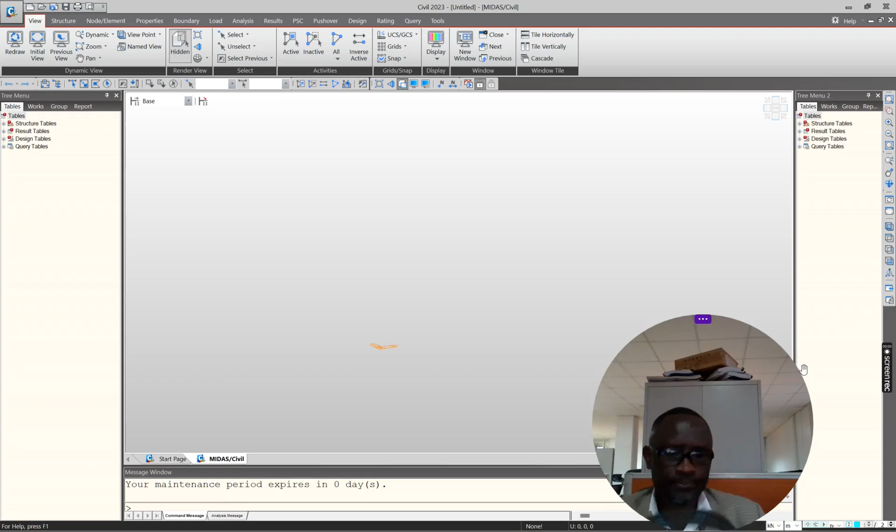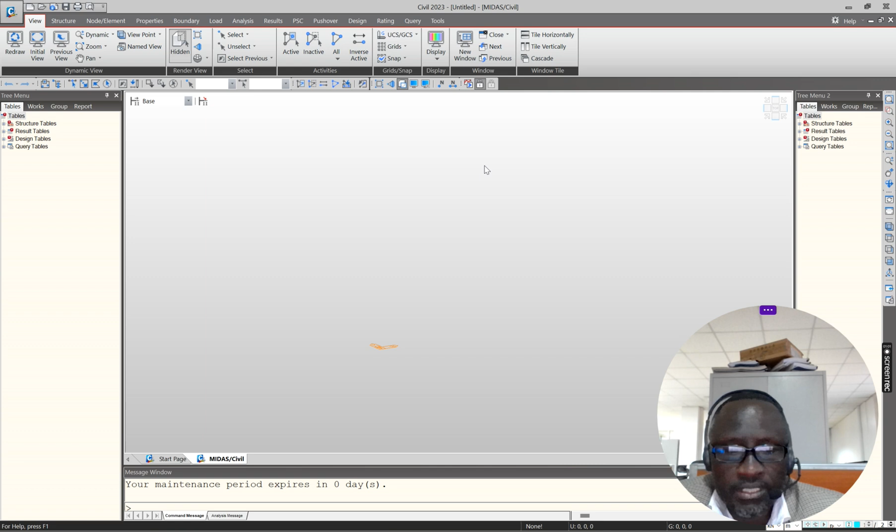So after opening my new model here, the first thing I need to do is, once I understand that the frame has a column of 250 by 250 and a beam of 300 by 250. The longer span has 5 meter spacings and then 9 meter. Some areas have a block infill, so I just want to quickly run a quick model and check the column

reinforcement and beam. So I go to my property materials, I come to add material, I go to steel, concrete, so concrete. When I come down, I think first try a compressive strength of 25. If the model does the design, that would be good. If not, I come to 37, because this model might need a design compressive strength of 37 to give you reinforcement checks. But let me also try that.

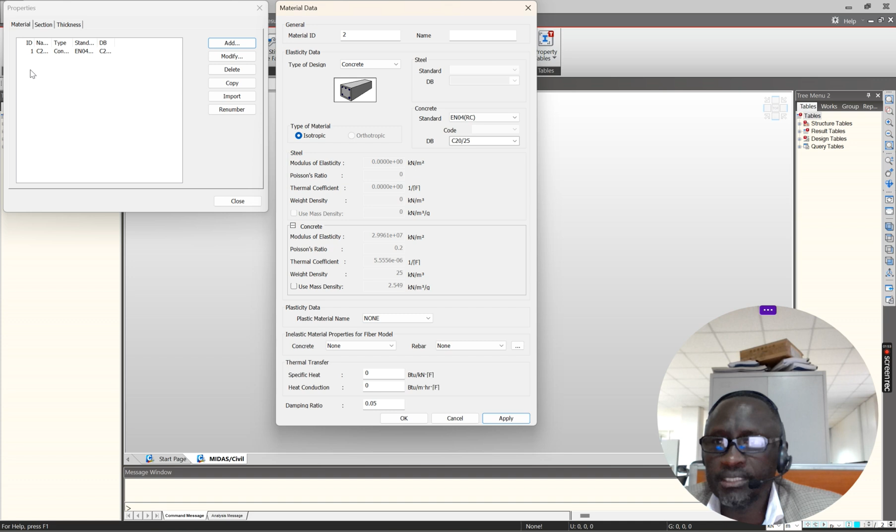Though most columns are supposed to have a compressive strength of that, this is a little bit complicated building. So you have that, you apply. Is there another material? No, this is the only one, and then there's the section. First close that, then I go to my sections. I add the section. Here I need a rectangular solid section, and I do user, and I call this RC.

And having done that, this is 0.3 by 0.3. I apply that, then I add the beam. So I have that 0.3 by 0.25. That's the breadth. Now here remember it's got to be center top. So when I measure from the top of the beam downwards, I put my center top, and then I say okay.

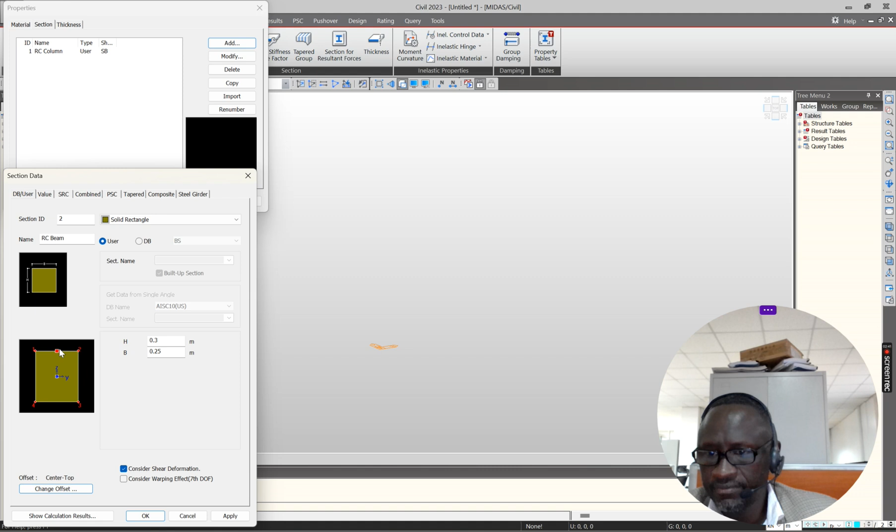You can see now the reference point is here. I apply, and that is what I've done. I close, and I look at the whole thing, they're all here. Then having done this, I'm now going to go to loads. From loads, I created a load, I apply. This is now where the load is created.

So what I do now, using the extrude command, I will extrude my column. Here is all given here, materials and the columns, and then the tip will be going up, so 0.5, and after the ring beam it's 3 meters. I put my 6 in. That is the column, and that is the view.

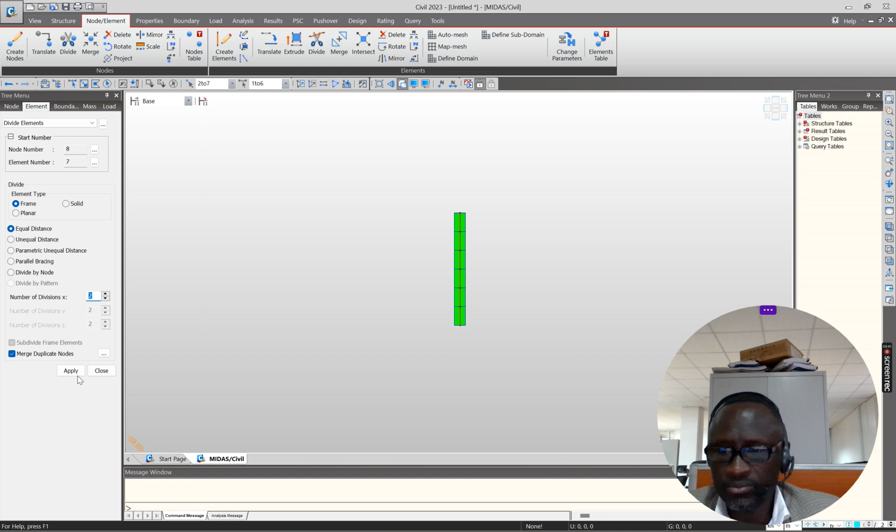I can see what I subdivide this into. So I come to division here, and then I want to do more, I apply. So that is what I do. Now this column, I told you I can offset. This is my column. I can offset this column. They call it translating. So I translate this column in the y direction by 9 meters. And I make sure all the nodes, intersections and elements are copied.

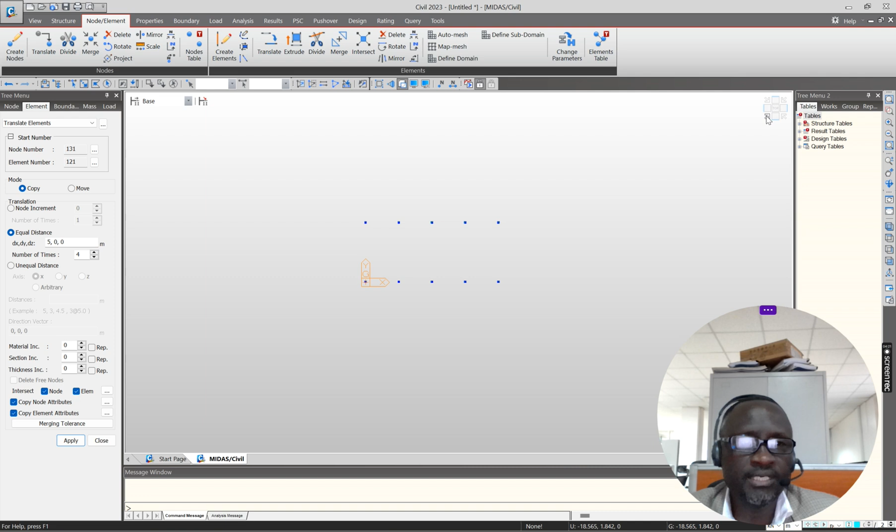I apply, it's there. Then I need to offset this column again in the x direction, which is 5 meters, and there are 4 of them, giving me 20 meters. So these are the columns you do first. Then having done that, I told you, I can connect the beams. So there are 2 lines of beam. There's one at the window and door level, then one at the roof level.

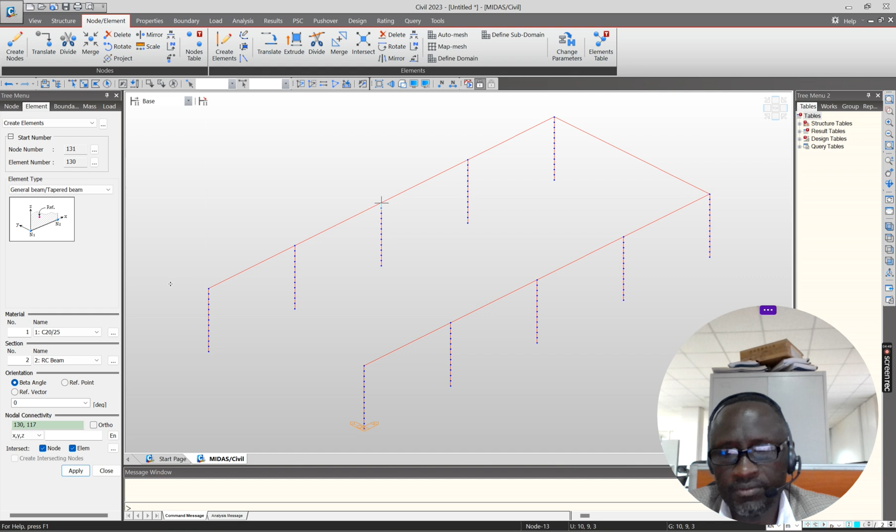So I come and create element. I am creating now the beam. I create the first one. I create the beams at the roof level. This section has a compound. This is an open area. This is an open area, and this is the classroom enclosed with the wall.

Then I need the second beam. That's about 2 meters. So at around 2 meters you have that, and then around 3 meters you have that, and then I also connect this, I connect this, and then also try to connect this beam. So when you view, you are done with that. But I also want to subdivide them. You just subdivide this into 10.

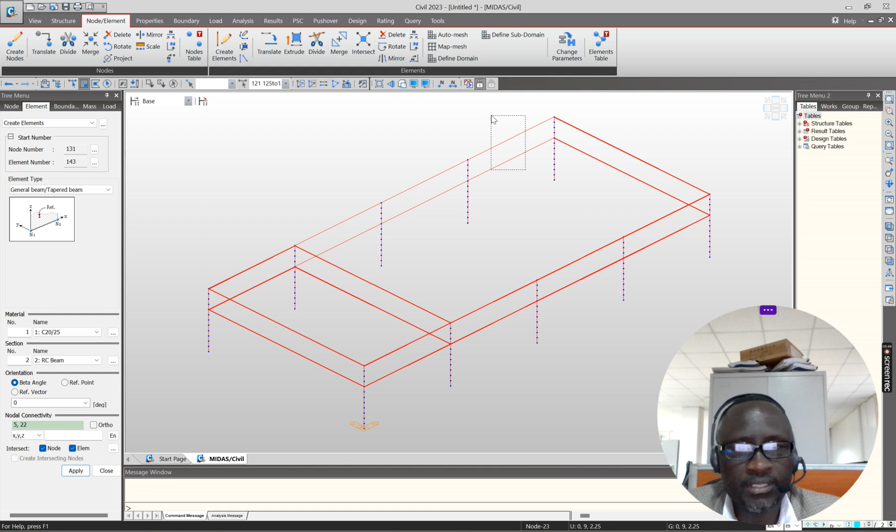For smoothing of your bending moment, and zero for... here I put 10. Now where we have wall here, I'm going to create what they call spring constant, because it's not pure. This is purely suspended, while this is not suspended. This one is suspended, this one has wall down, this one has wall down, this area has wall down, and that one has wall down.

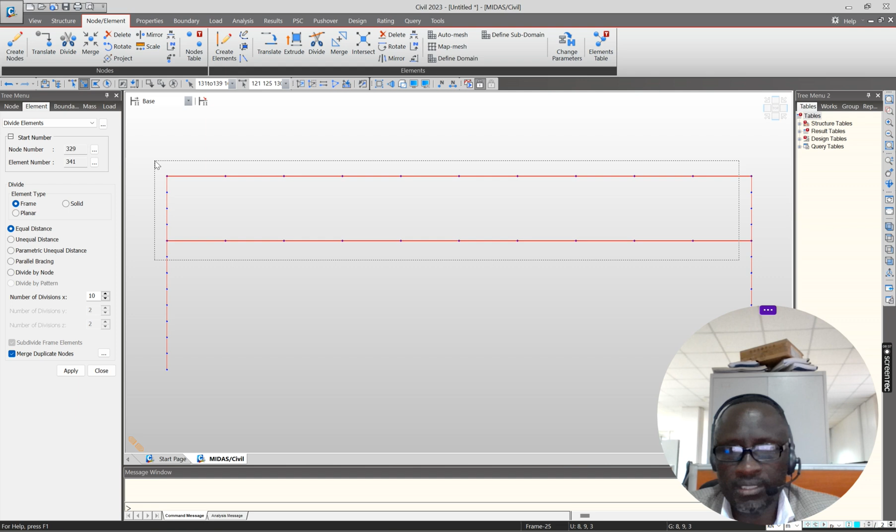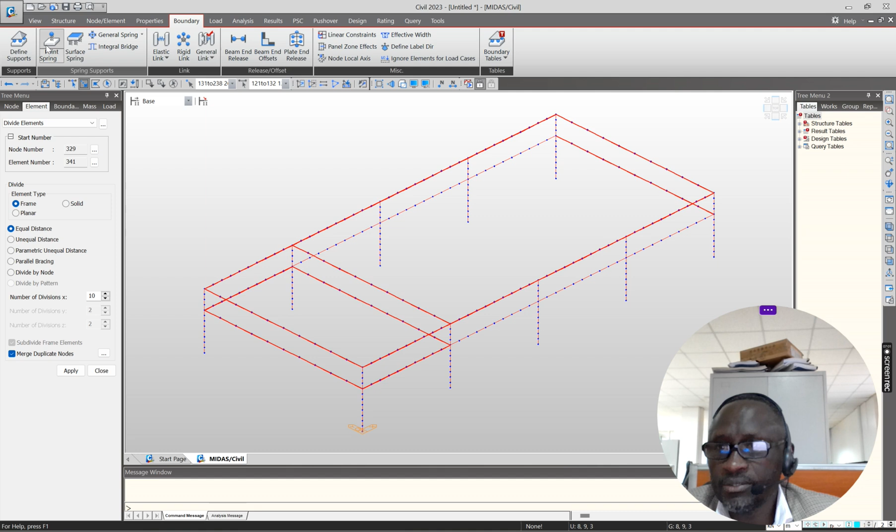So I'll do this: I highlight all these nodes here, I highlight them. I can do this node, and also highlight this node. So when you have 3D, that is the node, the rest are gone, and then the upper one also will be highlighted, because there's a beam infill here. So you are able now to do what they call boundary spring constant. I will fix it for one, but I can give it a value. I need to research and get it running.

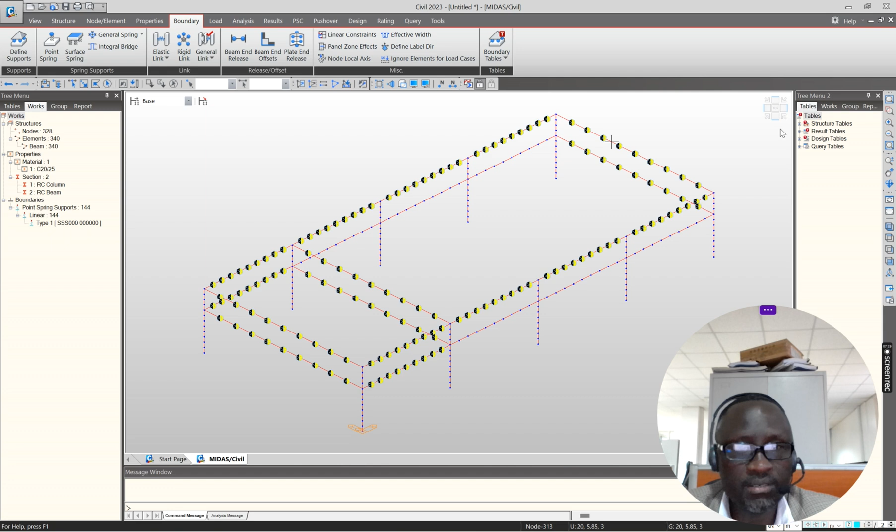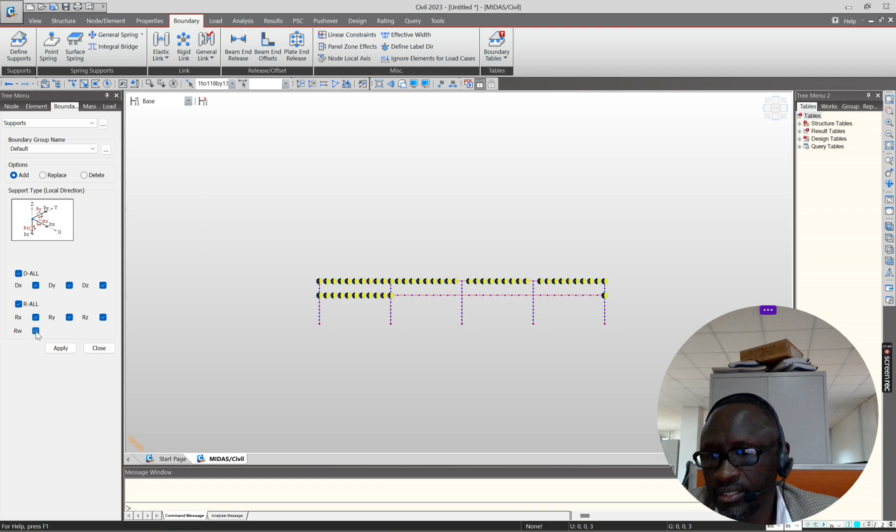So that defines my simulation, that they are bearing on something, they are bearing on the wall. So that is what we need to do. Then, having done all that, I am going to make a boundary connection to simulate the foundation at this point, at the column position. I come to boundary and make sure I do that, fix it. We have that fixed. So I can now save this model.

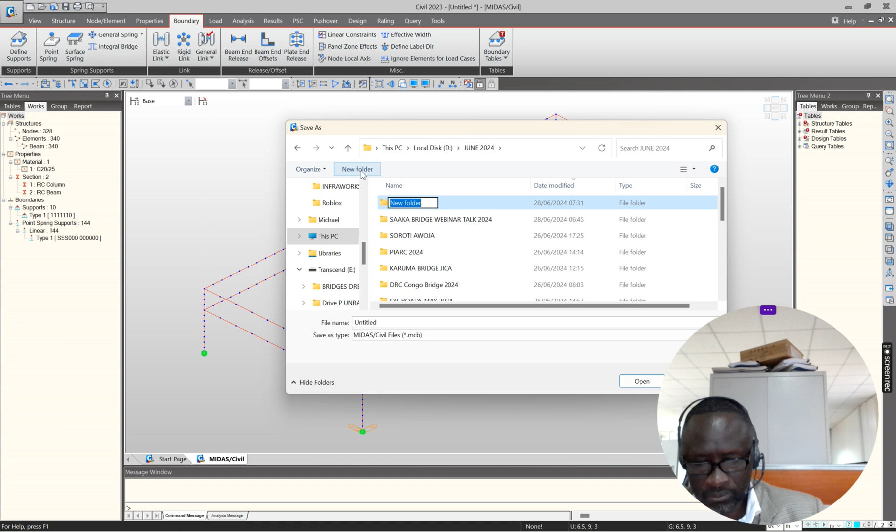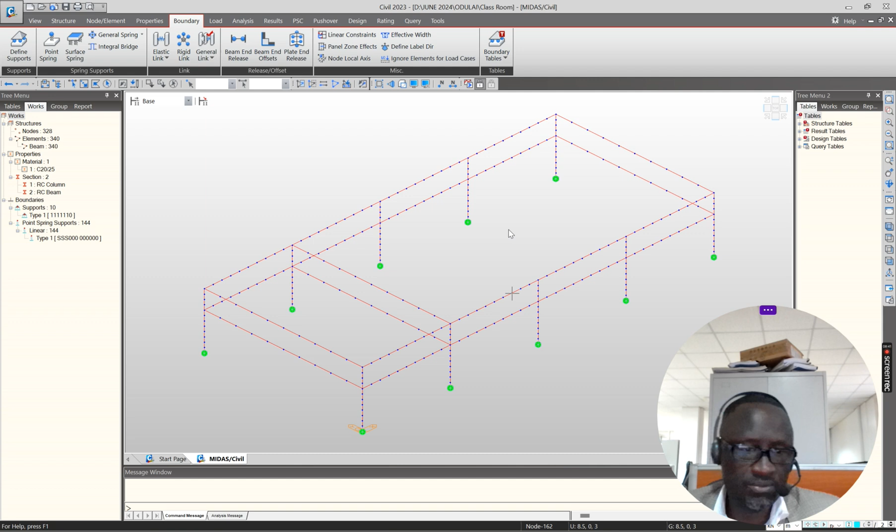I can do it here. Okay, so now I'm done with this. So what more do we do? This model is ready enough. The model is done. Now I need to apply the loads. Then I go to my loads, I go to my static, then I do self weight.

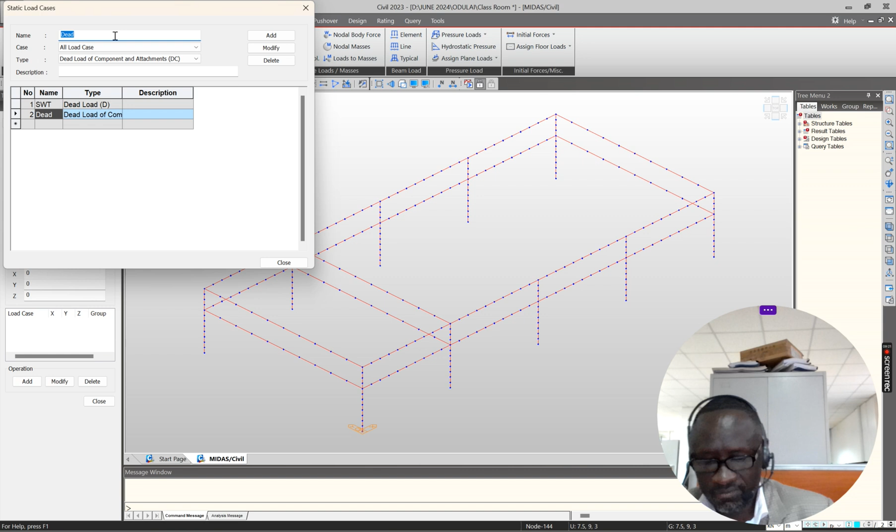I told you the load case name self weight is normally the dead load, indicated as D, to reflect the member size you're given. Then, like the dead load we normally do, we add on this. That is now the dead load, another component, and then I need the live load. The live load is always given down here. For this building, I don't expect wind, so I'm not going to include wind. Even if I could do that, I close.

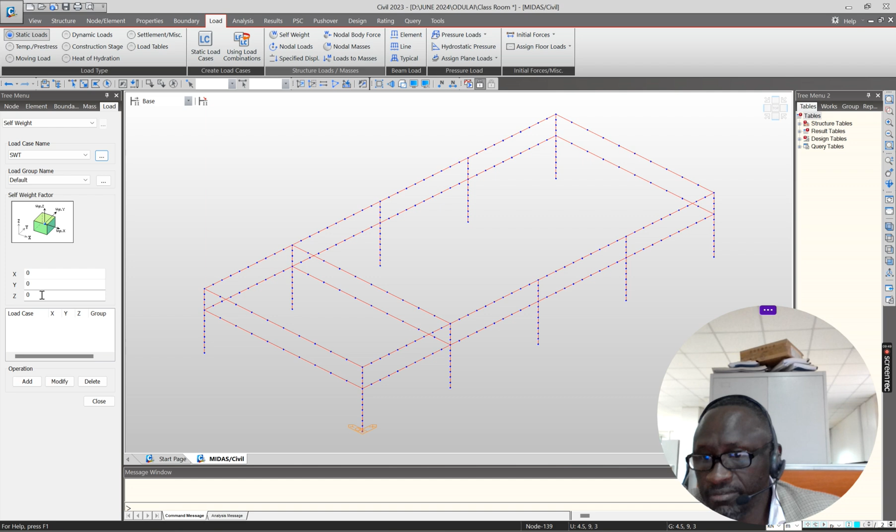And then here, the self-weight load case, don't forget the number to be this. Then under the self-weight factor, it is Z and negative 1. Make sure you add it. If you don't, it means only the other loads will be affecting your building; self-weight will not be taken. So I can quickly run a self-weight load and see how it behaves. I look at my reaction to self-weight, region and value.

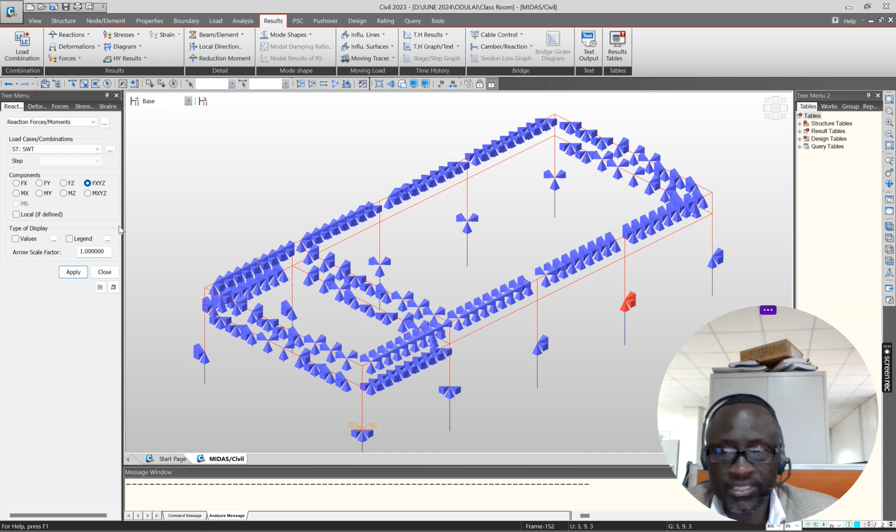Now, because I had indicated the spring here, that is why it's appearing. You get it? So if I first go back and delete it, will I get the same value? That is something worth trying to see. It is 18, more or less 18. So here I come to my spring and then I delete. Having deleted, I go back and run a design.

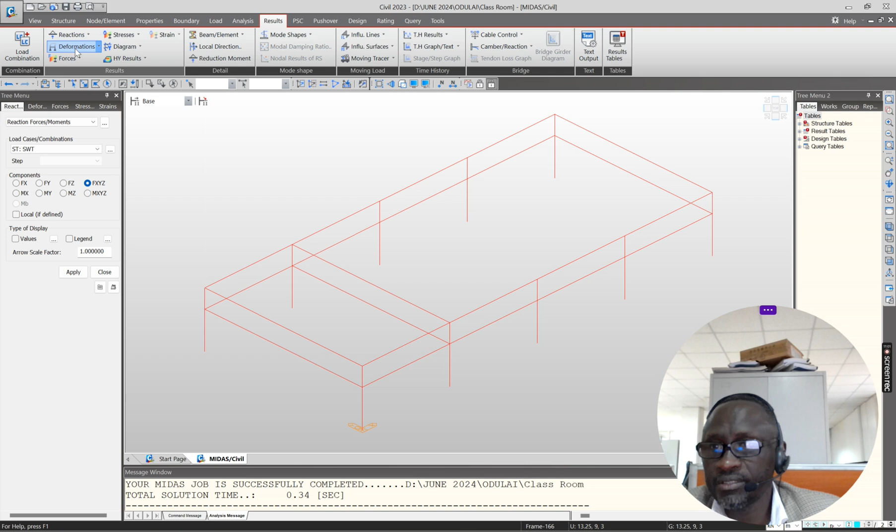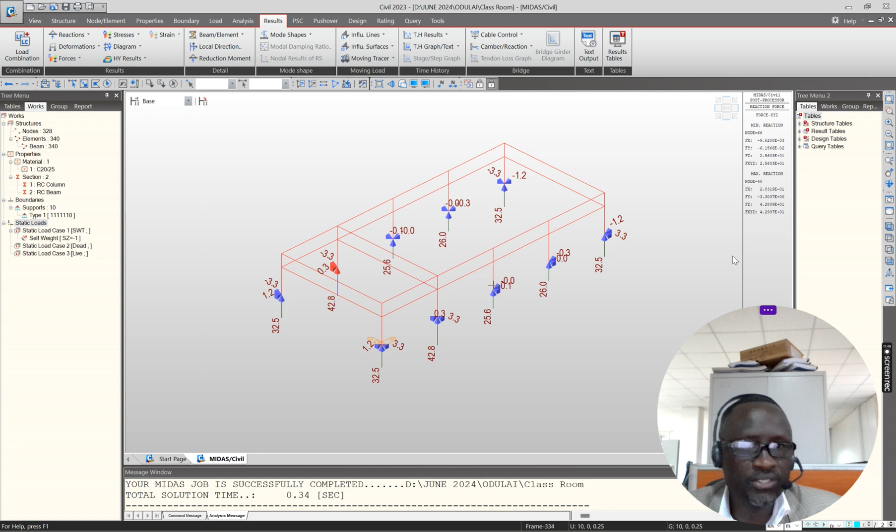But for now, for worst case, let me leave it at this, and then I can do the loading. I think it's about time up. Let me stop this, then I do the loading analysis later. This is a quick demonstration of how you can quickly look at your model up to the stage you can start application of loads. Thank you.